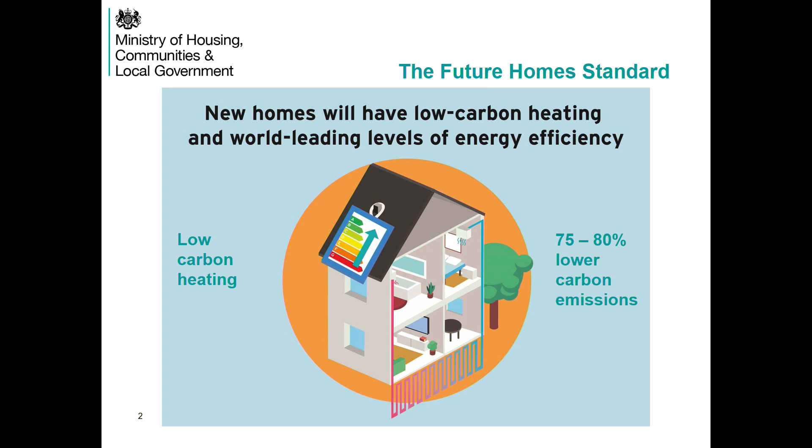So what is the Future Homes Standard? By 2025, we want homes to be extremely energy efficient and to have low carbon heating. So let's talk a bit about low carbon heating.

We think there are probably three leading technologies for low carbon heating. Heat pumps are going to be absolutely essential in decarbonising the building stock. But also we think heat networks are going to be really important as well—great in high density areas like cities, and great because they can decarbonise through time.

Another technology we think is important, but maybe not quite as important as the others, is direct electric heating. We think that's got a role to play where the fabric is really well insulated and you need not very much space heating. We're keen that the Future Homes Standard remains technology neutral, keeping it open for innovation, such as perhaps hydrogen in the future. We want to make sure any low carbon technology is accompanied by really high levels of energy efficiency, and the Future Homes Standard is intended to deliver 75 to 80% lower carbon emissions than our new homes right now.

So let's talk about a little bit of context while we're talking about electric heating. As well as standards for new homes, there's a lot of work going on nationally, changes occurring in the electricity grid. Historically, the North Sea has been an oil and gas resource, but now there's actually quite a large amount of wind turbines there as well. Growing the capacity of renewables on the grid and moving away from coal in our power stations means the reduction of the carbon intensity of our grid has really increased recently.

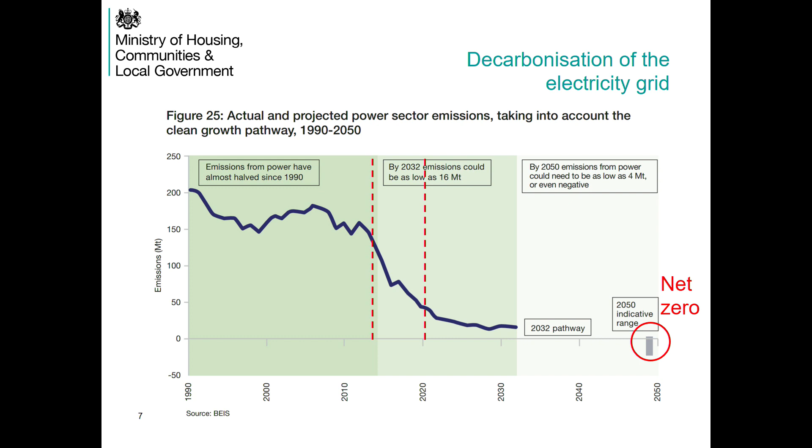So let's talk about how we're going to get to the Future Homes Standard in 2025. The Future Home Standard consultation was all about what we're doing in 2020 to get us there. We're proposing an interim step in 2020 to increase the energy efficiency of homes right now, make sure they're low carbon right now, and prepare us for 2025.

We presented two consultation options, option 1 and option 2. Option 1 is a 20% reduction in carbon emissions compared to our current standard, and the idea is it delivers the fabric standard we need ready for 2025. Option 2, our preferred option, is an even more ambitious uplift of 30%, but it means it should start encouraging people to install heat pumps right now, and getting those supply chains and skills ready for 2025 is absolutely fundamental.

I'm going to show you some examples in a minute, but before I do that, I'm going to tell you a bit about the metrics we're using.

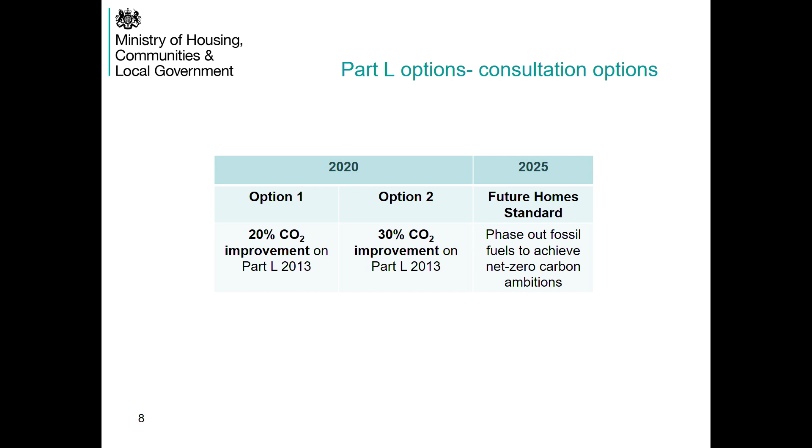We're proposing to keep our carbon target as we do now. We're also thinking of introducing a primary energy metric, to drive overall building energy efficiency. We're going to keep our backstops - our minimum standards for fabric and for building services efficiencies - but we're going to uplift both of those a little bit, and you can see the proposals in the consultation.

We're also considering introducing a brand new metric alongside primary energy - affordability. In the national calculation method SAP, we already estimate running costs, and we're thinking of using that estimate to make sure bills are really low in new homes. The idea is to make sure that if you're using electric heating in a brand new home, such as direct electric heating or heat pumps, it's really good for the consumer. In the consultation, we asked for views on where this level should be set.

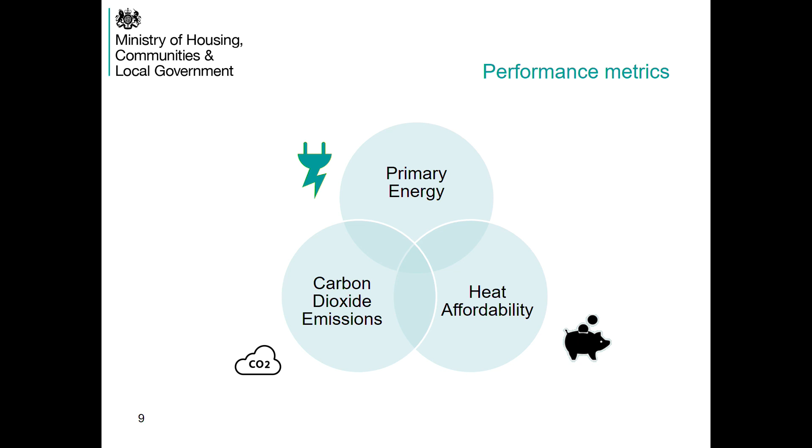Let's go through a couple of examples. These results can all be made by using the new consultation version of SAP, which was out for the consultation, and we've left it live so people can keep testing their building designs.

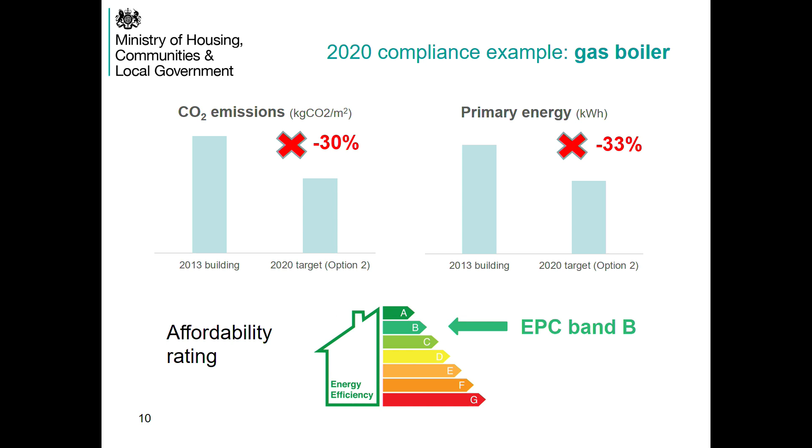This building is a 2013 home, but with a gas boiler, and we tested it against the 3 different metrics. It fails on CO2 emissions, it fails on primary energy, and it's got an EPC band of around B. To meet the 30% uplift we're proposing for 2020, in the consultation we proposed you could add some solar PV panels and wastewater heat recovery. That still won't get you all the way to this 30% uplift, so you'd also need fabric measures - probably slightly better windows and roof - to get you all the way there. It's an EPC band B, so it's likely to be okay for affordability.

Let's look at this with a heat pump instead. This is a 2013 home - get rid of your gas boiler, put in a heat pump. It passes CO2 emissions quite comfortably, but it fails on primary energy. You'd make a 19% improvement on your primary energy and get to only an EPC band of C. So meeting 2013 fabric standards and just putting in a heat pump is not going to get you there - you need to do quite a lot more to meet this primary energy standard. And depending on where we set the affordability metric, it might not pass on that either.

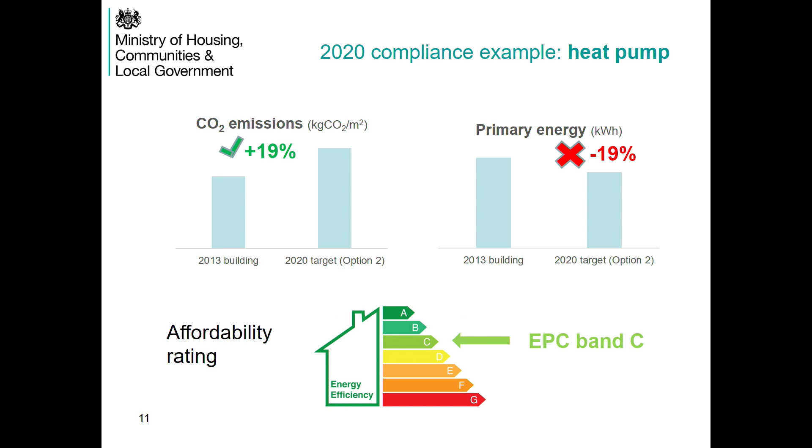I'm going to say a couple of words on transitional arrangements. So when we make changes to building regulations, we recognise that industry needs a bit of time to adapt to these changes, particularly if they're fairly major changes in the way we construct buildings. So we historically allow a period of transition before housebuilders have to adopt the brand new standard.

It's for a really good reason, but in the past this has led to some housing developments being built to quite old standards. There are examples right now of housing being completed to 2006 standards, and that's not right. That's not the point of transitional arrangements.

So to prepare us to get to the 2025 standard and to transition there quickly, we're proposing a more stringent set of transitional arrangements.

Those transitional arrangements we laid out in the consultation, and the proposal is that they will apply only to individual buildings, so individual homes on site, and also that they'll only apply when building is started within a reasonable period. We consulted on what we think a reasonable period is, and we've had some really helpful feedback from the house building industry on what they think reasonable means.

This is the first time this has been proposed for any building regulation. We just want to make sure that new dwellings are meeting this new up-to-date standard ready for 2025.

This is a national standard for England, and it's a huge step change in the energy efficiency of new homes. It's a consistent national standard across the country, and it's underpinned by significant technical work and extensive consultation. It can't be negotiated away by developers, and neither does it rely on carbon offsetting schemes.

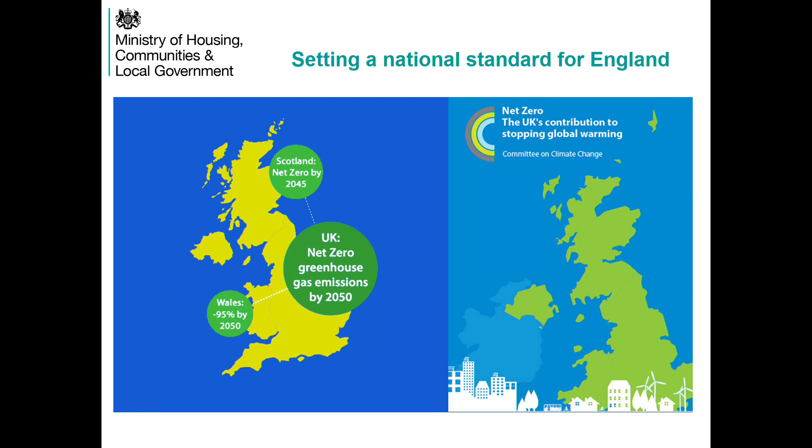Very briefly, I'm just going to tell you about a couple of other things in the Future Homes Standard consultation, just a bit of a plug. So it wasn't just about energy efficiency, it was also about ventilation.

We proposed some improved standards based on latest evidence. We proposed to improve the air tightness testing regime, to open it up to innovation and make it a bit more independent. We also proposed some ways of improving build quality, reducing the performance gap, making sure that homes perform really well in practice and not just on paper.

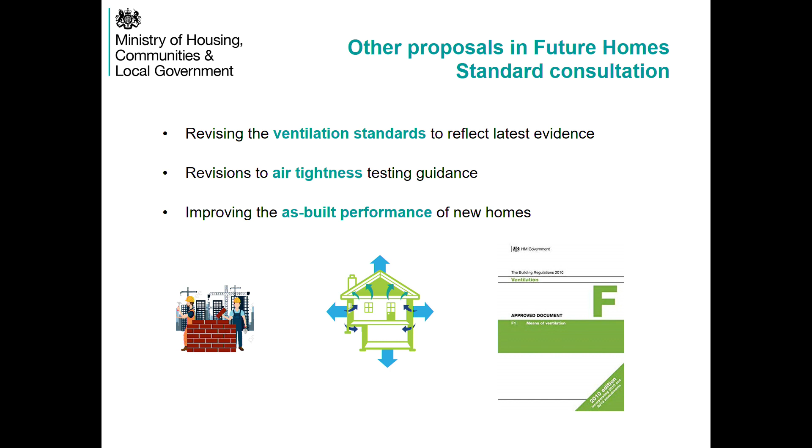We also committed in that consultation to another one, so look out over the next few months, there's something else coming. The next consultation will include overheating, which I know is a topic close to many people's hearts.

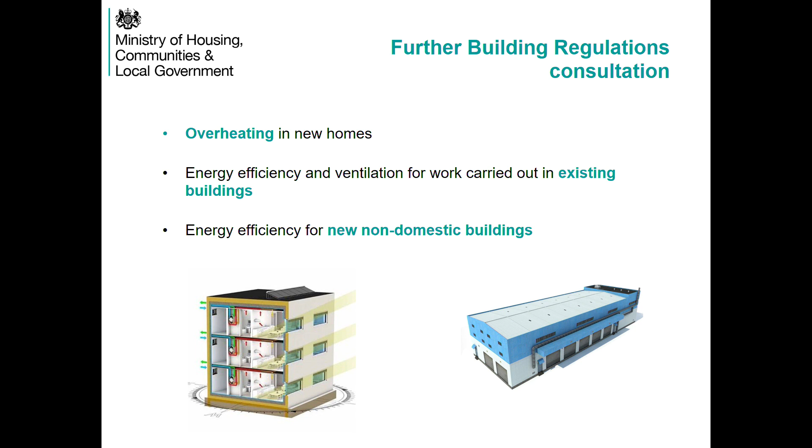I'm going to tell you a couple of very brief things about overheating because it's so heavily linked to housing. So we put out some research alongside the Future Homes Standard. I recommend that you have a look, it gives you a bit of an idea about where we might go in the future.

It showed that overheating isn't just a London issue, it isn't just a southeast problem, and there's overheating occurring all over the country.

Particularly at a time when we're increasing energy efficiency standards, summers are getting hotter and more extreme. We've got an ageing population who are spending more time indoors. Overheating becomes really quite important, and we'll be addressing this in our next consultation.

Just very, very briefly as well, because it launched this week and I should really say something about it. On the Buildings Mission, the government are looking beyond 2025, considering what technologies will be available in the future, and also considering the issues of an ageing population alongside climate change and energy efficiency.

That's why this week government has launched the Home of 2030 design competition. It's been created to drive innovation in the provision of affordable, efficient and healthy green homes, and there's a £40,000 prize awarded to all shortlisted entrants.

I believe that the people that win, there'll be 3 winners, they'll get to work with Homes England and look at maybe developing some of these homes, so it should be really good. The idea is to showcase best practice and start normalising these sort of interesting future-looking designs that are good for the environment and also suit an ageing population.

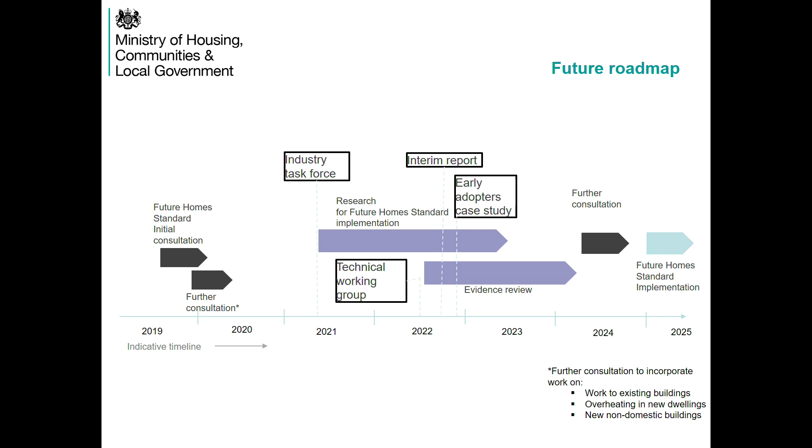Thank you very much, Victoria. I really appreciate your coming along, and I know the Part L consultation has stimulated many, many conversations and now lots and lots of responses, so I'm sure we'll get some questions on that later.

Right now I'd like to move on to our next speaker, who's Tom Dollard, an architect and head of sustainable design at Pollard Thomas and Edwards. Tom's going to talk about some examples from the BEIS Building for 2050 programme, which he's one of the lead assessors on. Thanks, Tom.

Thanks, Lynn. Hi everyone, I'm Tom Dollard. I'm working with my company, Pollard Thomas Edwards, and AECOM on this project for BEIS. It's called Building for 2050, looking at low carbon, low cost housing - how do we upscale low carbon housing for the future? I've got a very short film that we produced to introduce the project. We're working on a longer film that will be issued next year.

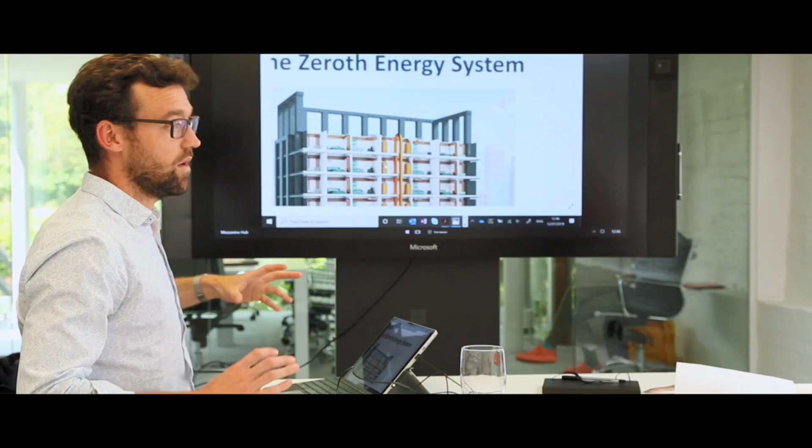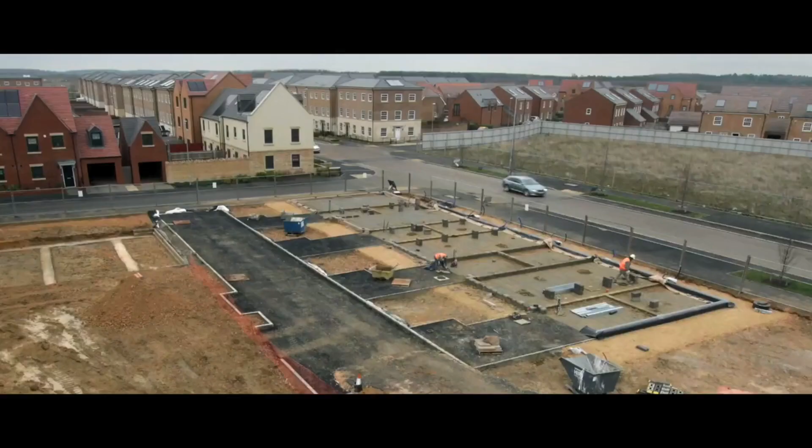Heating and powering buildings accounts for 40% of our total energy usage in the UK. By making our buildings more energy efficient and embracing smart technologies, we can cut household energy bills, reduce demand for energy, and boost economic growth while meeting targets for carbon reduction. As part of the move towards these goals, the government has funded Building for 2050 through the BEIS Energy Research Programme, a major 3-year research project set up to evaluate what can be done now to accelerate the shift towards wide-scale construction and adoption of low-cost, low-carbon homes.

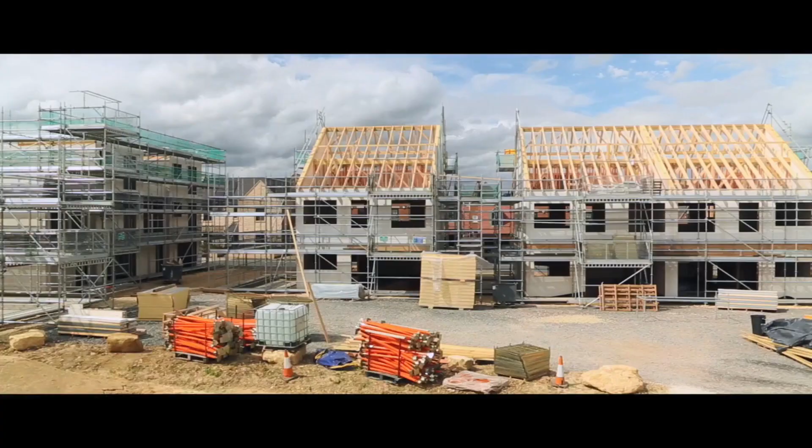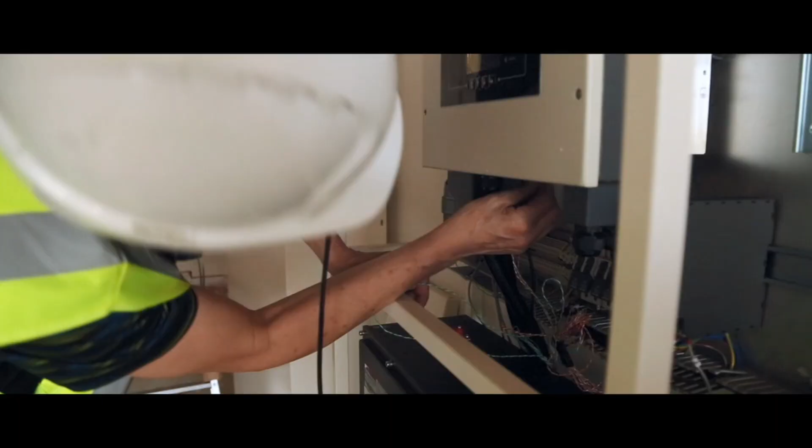To do this, low-carbon housing developments across England and Wales are being evaluated from start through to occupation. We've got an interesting project here which is doing both social research, asking people for their views, and physical research, testing the homes, seeing how well they're built, and measuring how much energy they use when people live in them, people like you and me. The team is carrying out detailed interviews and observations of the construction projects, including a wide range of stakeholders, interviewing 100 experts from industry and beyond to find out how best to meet this challenge.

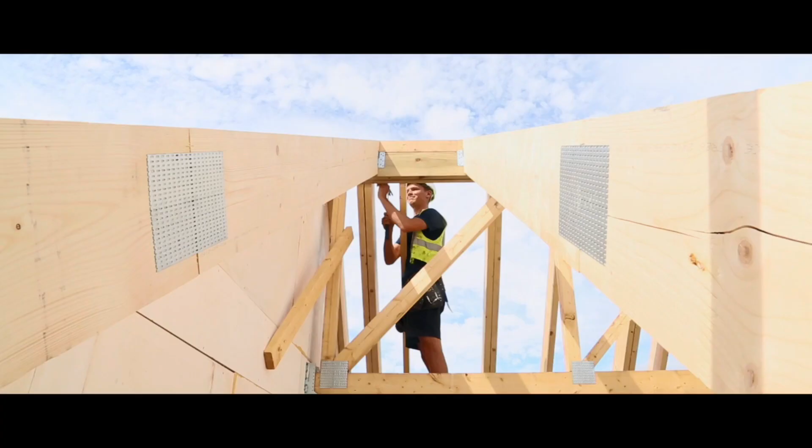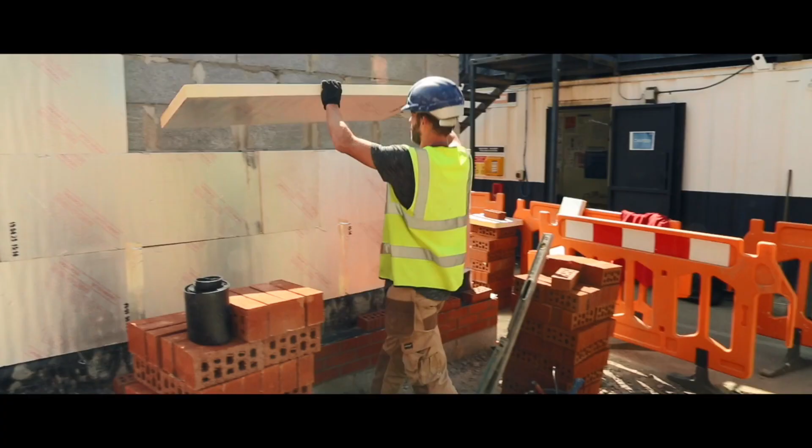Really excited about our findings, the potential outcomes. I think they have great potential to change policy and, more importantly, demonstrate to industry that these sorts of homes are very buildable, cost effective, and being done now. So why can't we build every new home as a low carbon home? The project will conclude in 2021 by delivering key research findings and recommendations to find ways to increase demand, improve supply, and deliver improved energy and carbon performance across the UK.

As I said, we'll have an update with a lot more detail in a year's time. So if you want to know a lot more detail about the methodology and our findings, that will be available in the next film. So, this is I think this is what the film said - project objectives, there are 7 project objectives. Context - we've done a year's worth of literature review and seen who else is doing low carbon housing in the industry. Drivers and barriers - what are the drivers, barriers, attitudes and challenges to building low carbon homes?

Understanding the occupant experience - this is primarily a social research project. We really want to understand the attitudes and expectations of residents, and the role of technology: are we fitting the right technologies suitable for residents in these projects?

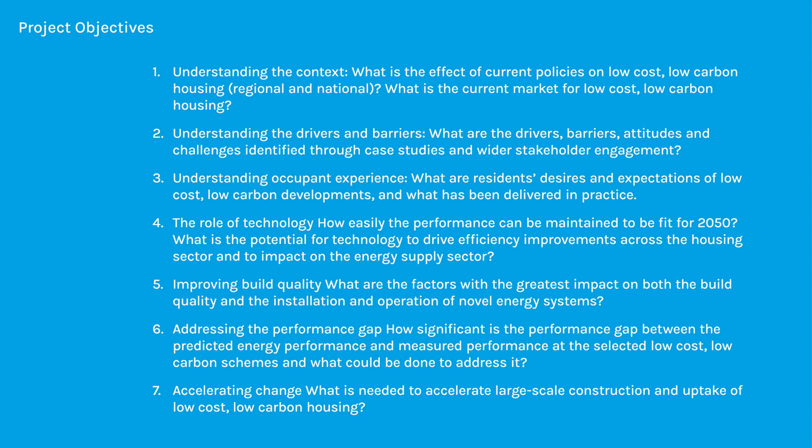Then improving the build quality - you've got to make sure these are installed correctly and deliver the desired outcomes. Then the performance gap, which is a key part of the energy strategy for the UK, actually delivering what you set out to design. And finally, how do we accelerate large-scale construction and uptake of these homes, increasing supply to the mainstream?

My role is leading on the site review process. This is just a small amount of what we're doing on site. We undertake about 7 site reviews during construction, reviewing every stage of the build as it goes along. At the end we do post-construction fabric and service testing - thermography, in situ U-value testing, tracer gas test, ventilation commissioning and testing. And then we have a year's worth of occupancy monitoring across energy and environmental outcomes.

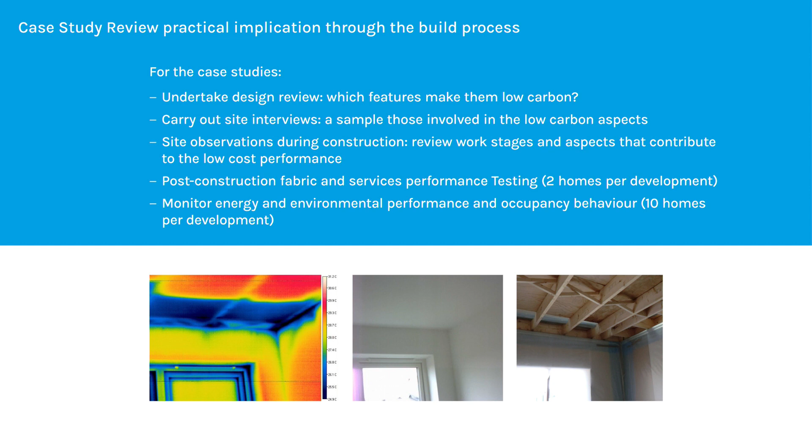The other 50% is all the social side. We do intensive focus groups with residents before they move in, 3 months into their living period, and a year after they've moved in.

This is an insight into our checklist for sites - the first fix stage. This is myself and my team going through the elements in SAP, checking the ventilation ducting is the same as design. We know from previous research that ventilation and gaps in insulation is a common performance gap, so we're looking for those as we move through the site.

Other simple things we're doing on site: checking the insulation is the same specification, checking the dimensions of walls, party walls for example, and checking for thermal bypass, where air moves through the insulation and causes worse performance. Essentially carrying out rigorous quality assurance, marking down where there might be a difference between design and as-built.

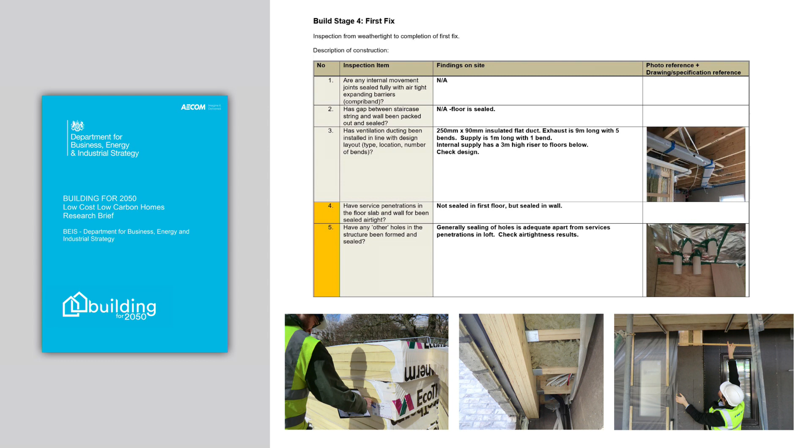At the end we carry out an as-built model based on that project, so we can tell the development team how far off they are in terms of energy and environmental performance. After it's complete, we've got a process of gathering social views across the industry and residents, interviewing more than 100 stakeholders from inside and outside industry, to button down this research question and get good recommendations for government and industry. Our final report will be out 2021-2022, with ongoing dissemination throughout.

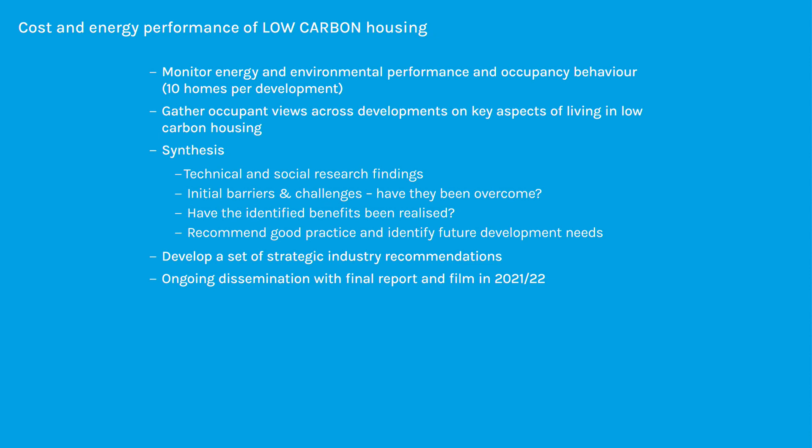I'm going to spend a minute now - mostly it's case study methodology. We've got 4 detailed case studies and a series of smaller case studies we've brought in, but these are the detailed ones where we do the complete process.

This is Active Homes in Neath, part of Pobl, the largest housing association in Wales, who partnered with the Active Building Centre to deliver Active Homes. Essentially it's fabric first, solution first, then you have TSCs - transpired solar collectors - providing a preheat to the heat pump, and solar PV, building integrated on the roof, powering batteries.

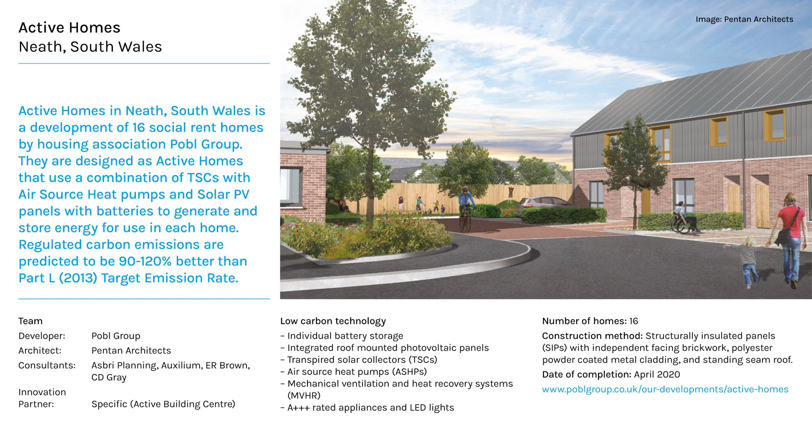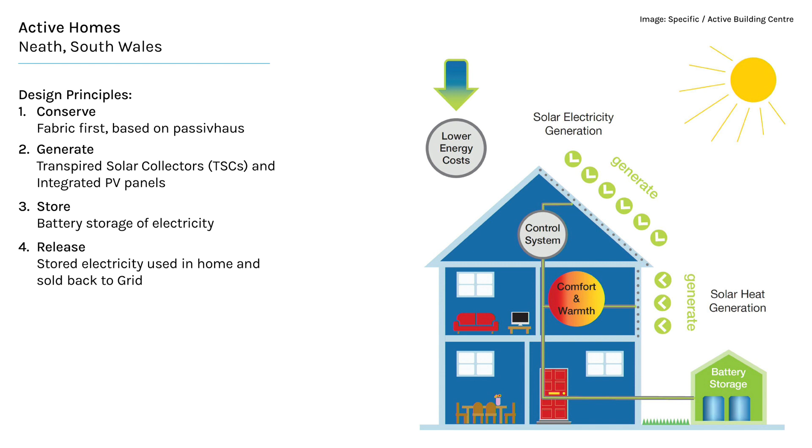Early stage tests show they're meeting the old zero carbon standard of 100% regulated energy, producing around 60% of their own energy through PV and battery storage. It's also an off-site timber frame, and they're working on how to produce that in the next iterations to include windows and other elements like floors and other off-site technology. That's the strategy, and the Active Building Centre design principles are: conserve, generate, store and release. That's a photo of site progress from last year - they're now due to hand over next month.

Second case study is in Corby - Project Etopia, Etopia Homes. It's 47 fully modular homes using a steel frame system, and the steel frame system meets the Passive House requirements.

In terms of low carbon technology, they have an earth store energy bank in the ground, and a ground source heat pump that receives energy from that interseasonal storage. They have a photovoltaic thermal hybrid solar array - PVT panels on the roof producing hot water and electric - and they have MVHR as well, as they're going down the Passive House route for fabric.

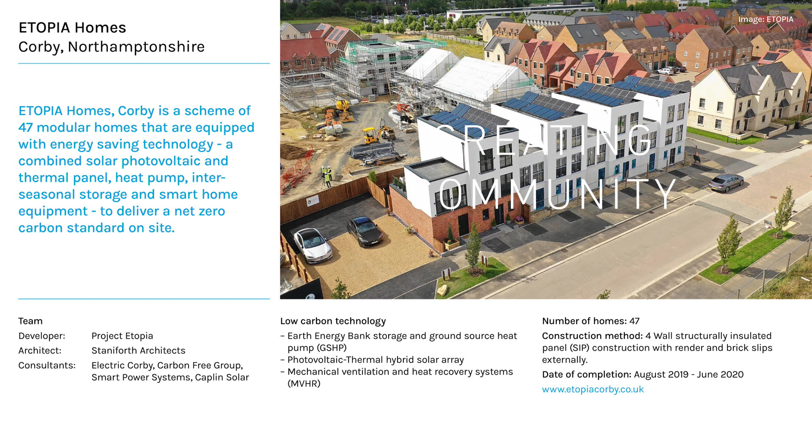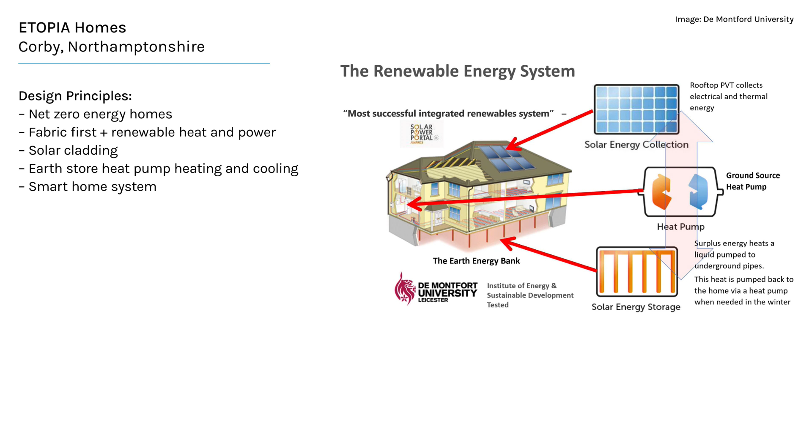That's the diagram of the technology involved. Probably the earth store heat pump is the most innovative part of this design, and they're clearly hitting the definition of net zero energy across all the primary energy.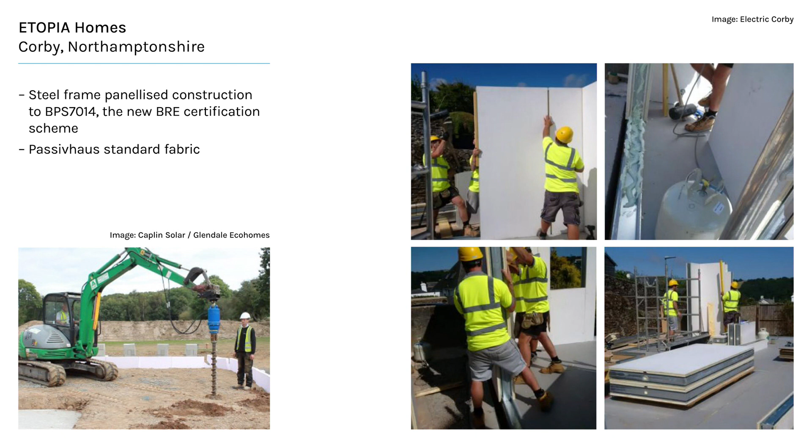The third case study is Marmalade Lane in Cambridge, and it's 42 custom-built homes. It's a co-housing project, very well covered in the press from the co-housing side, but it's also pushing the boundaries of a fabric-first approach with air source heat pumps and solar PV.

They didn't actually achieve the Passive House standard. They were slightly short on the air tightness, but the crucial thing is they set themselves a target for the fabric, which is 35 kilowatt hours, and aimed to achieve that and modelled it with PHPP. So it's a non-Passive House scheme, but it's learning from Passive House methodology.

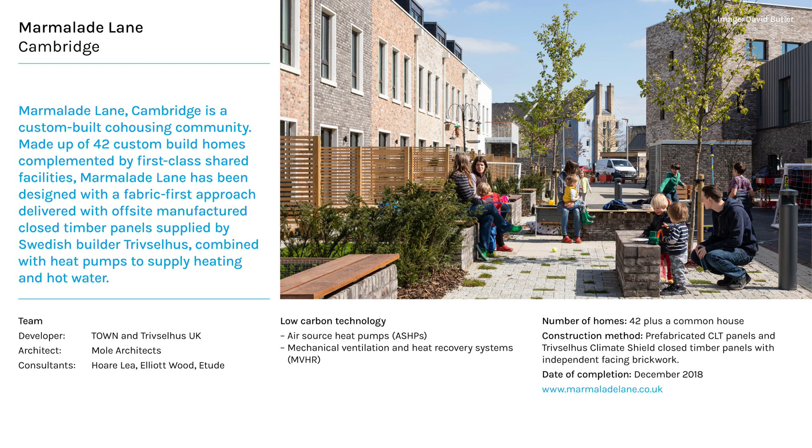It's also using prefabricated timber panels from Trivselhus and CLT panels in the apartment block. There's a 3D view, and a detail from the architect, Mole Architects, showing the level of detail, the attention to detail you have to get to if you're doing a high fabric, low carbon home.

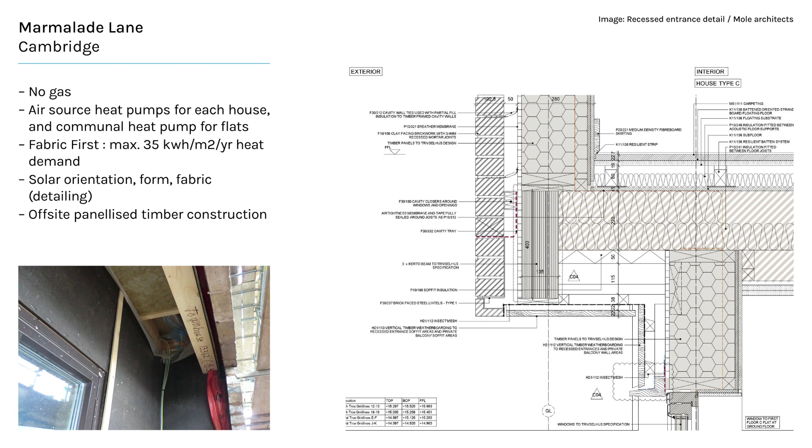And then finally, the last case study in London. We were really keen to get a London-based case study to show high density, because there's a lot of case studies looking at low-density housing, and it's almost straightforward to achieve net zero with low-density housing, but a lot harder with high-density apartments. So this is a 4-story apartment scheme, which could be scaled up to any height really.

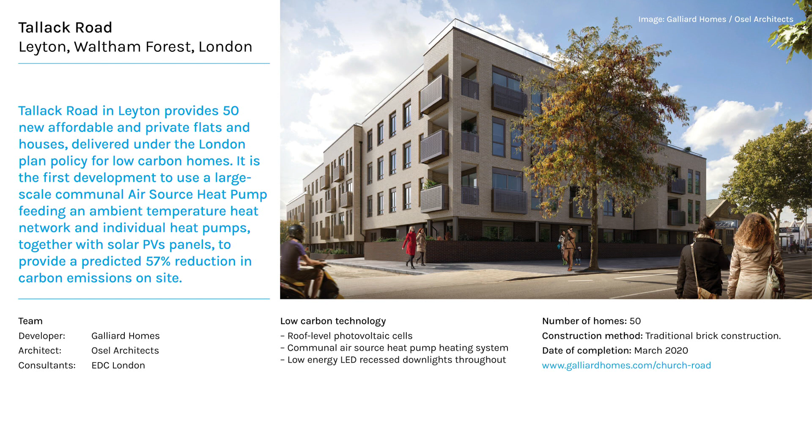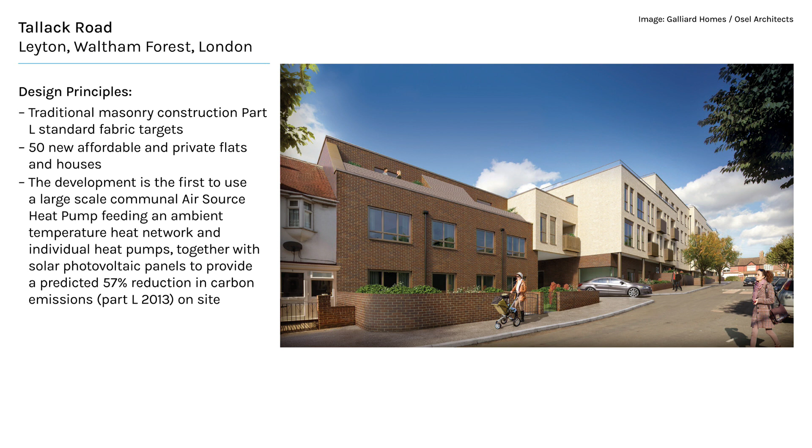The key technology is an air source heat pump that then ties into a water-to-water heat pump in each flat. It's fairly standard masonry construction, and there's certainly a question about when you're putting in heat pumps, does it allow you to relax the fabric standards? If you're looking at something like the Future Home Standard, can you get away with relaxing fabric, or should that be disincentivized? Because on this project, they put a heat pump in, and without any fabric improvements, they're getting 57% improvement on Part L. That's the heat pump system: a communal heat pump in the basement, and then individual water-to-water heat pumps in each flat.

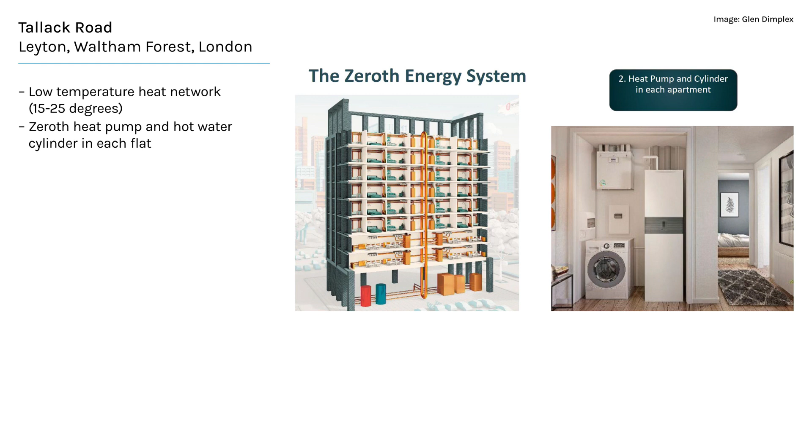To summarise, most of the developments bar one are finished now, so we're in the monitoring period. We've issued emerging findings to our clients, BEIS, and our stakeholder group in government, and now we're looking for wider industry stakeholders to come forward. We're looking at interviewing them, focus groups, and other case studies to see if we can do a slightly lighter version of POE, a slightly lighter version of what we've done on the other projects.

Findings and recommendations are due next year, and we're hoping to have some really positive and insightful lessons learned for the industry, to be able to show people that you can build low carbon homes now, and it is practical, it is cost efficient, and really there's no reason why we shouldn't be doing it next year. Thank you very much.

Thank you very much, Tom. We're all dying to get that wonderful set of information, so people will be knocking on your door. And also, you omitted to mention your wonderful book, Designed to Perform, which I'm sure has informed your assessment techniques on how to tackle the performance gap and the things to look out for.

So we're moving on to our next speaker, John Palmer, the Research and Policy Director of the Passivhaus Trust. John's going to talk about Passive House as a route for achieving zero carbon. Thanks, John.

Thank you very much, Lynn. Good afternoon, everybody. So, net zero — it's easy, isn't it? 65% of local authorities have declared a climate emergency, 75% of them have set a date for net zero. We've declared London's going to be net zero by 2030, plus 19 other cities.

So it's pretty straightforward. Let me tell you what I'm going to talk about. I'm going to start with some definitions, then define what I think net zero is going to be, how much renewable energy we'll need to make that net zero, and what our current standards are delivering.

Starting with some definitions, this is a chart from LETI, the London Energy Transformation Initiative, and it's really neat in displaying the difference between embodied energy and operational energy. Embodied energy is the energy which goes into construction, maintenance and disposal, and operational energy is the energy needed to run the building during its lifetime.

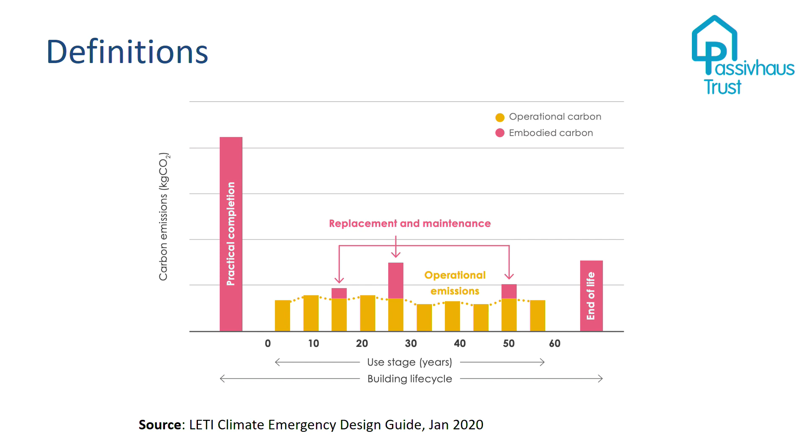Today I'm going to be talking about the operational energy, the yellow bits. Embodied energy is also required to get down to minimal and then offset to get to net zero, but today I'm going to be talking about net zero operational.

So, net zero operational. If you're able to, could you stand up please, everybody?

So, if you think that we have a chance of getting to net zero operational in the built environment for buildings by 2050, remain standing, otherwise sit down. Okay, a few people sitting down, mostly optimistic, excellent. If you think that we can get to net zero in the built environment operational for 2030, remain standing, otherwise sit down. A few stalwarts left. If you think we can get to net zero operational by 2025, remain standing, otherwise sit down.

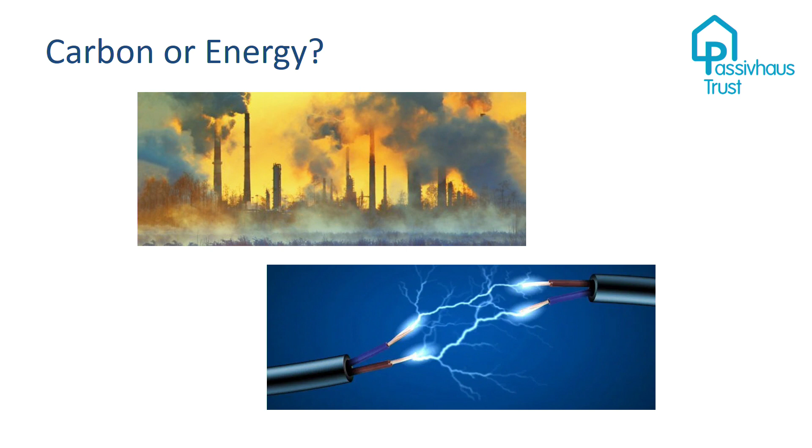No. What about energy? My 1 kilowatt light left on for an hour today uses 1 kilowatt hour of energy. In 10 years' time, if I leave that same light on for an hour, how much energy will it use? 1 kilowatt hour. So that's why, when it comes to buildings, we really need to be talking in terms of energy, not carbon. If we talk about energy, the carbon will look after itself.

So this is my little model of what net zero is. I'm going to talk about domestic buildings in the main, but this is similar to non-domestic. We've got heating, which is the biggest chunk at the bottom. Then we've got some hot water, and then we've got lighting. So if we want to be net zero, we've got two choices really. One is we go and live in a cave, we don't light fires, and we don't use any energy at all, and that is indeed net zero, but it doesn't sound too appetizing.

Or, whatever energy we do use, we offset with energy from where? From the sun, from wind, renewable energy. So we need to offset that energy. So if we've built our house and the amount of energy we've generated from renewable sources matches our heating, hot water and lighting, are we net zero? Hands up if you think we're net zero. A few. Well, no, we're not. And the reason we're not is because that's our regulatory version of how we use energy in buildings.

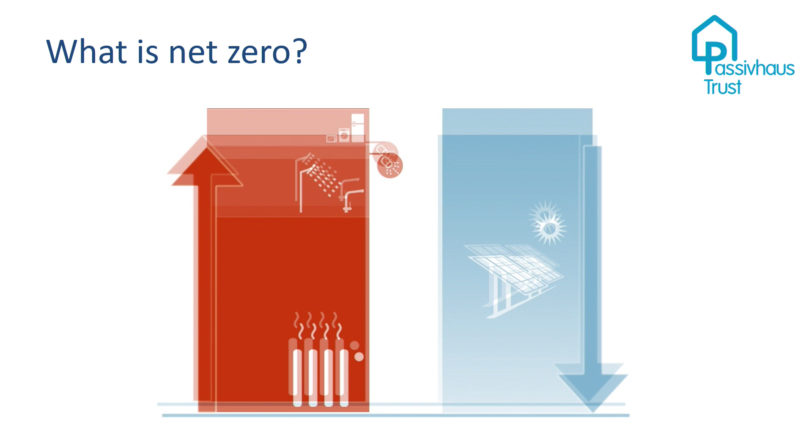We've forgotten something else which we use all the time in buildings, which is unregulated energy - that's plug loads. So we use appliances, fridges, TVs, etc. So now if we offset those, is that net zero? Any hands up for that? Oh, I've got one. So no, it's not. And the reason is because we've got to now move ourselves into a future nirvana. And in that future nirvana, be that 2030, 2040, 2050, are we burning any fossil fuels?

No, we're not. If we want to be net zero, we're not burning any fossil fuels. We cannot burn stuff, rule number one. So if we're not burning fossil fuels, where is our energy coming from?

Go on, shout out. Same, renewable sources. Okay, what is the main problem with renewable sources? Stops and starts, very good. So World Cup final, half time, does the wind conveniently blow and does the sun conveniently shine? No, it doesn't. So renewable energy comes when it feels like it. We can kind of predict it, but it's not reliable. So what does that mean?

That means we have to store it. What's the problem with storage? It's expensive, but what's the real main problem with storage? It's lossy. So if you put 1 kilowatt hour into storage, you might only get 0.9 kilowatt hour out, or 0.8, or 0.6, or 0.5, depending on your type of storage and how long you store it for.

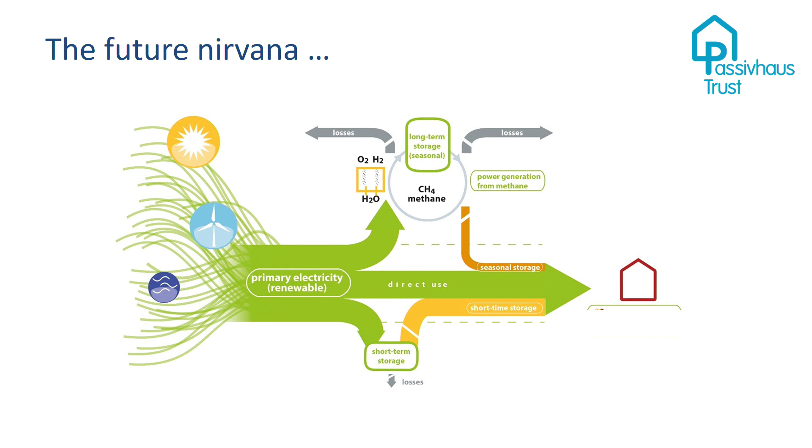So if you have lots of renewable energy in, for example, the summer sun, and you are only going to be able to use that in the winter when you need heating, that's interseasonal storage, which Tom touched on earlier, which is traditionally very lossy. So that means we've got to store things. That means for my building, if I need 1 kilowatt hour to run it, and I use storage, I actually might need 1.2 kilowatt hours or 1.6 kilowatt hours of renewable energy to actually make it net zero. So that means my actual net zero is not only my heating, my hot water, my lighting, my appliances, but also my storage losses in our future world.

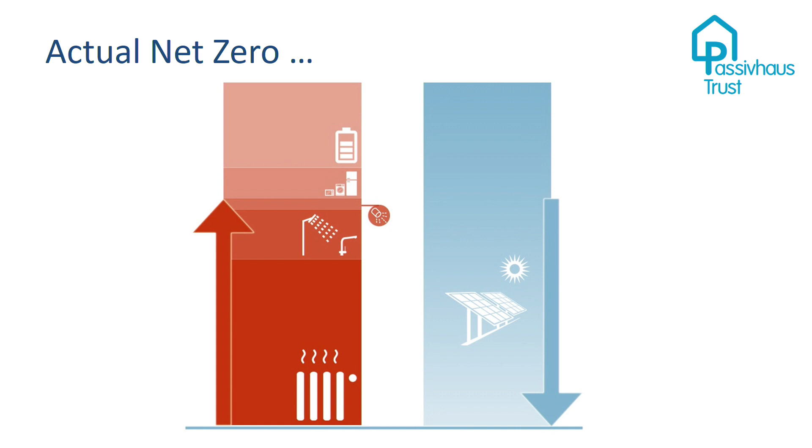So my column has got quite tall now, hasn't it? That means that the more I use, the more storage I need, the more storage losses there are, the grid needs to be able to cope with that, and I've got higher peak load, and I need more renewables. So is that achievable? Do I need a tall column, or a small column, or somewhere in between?

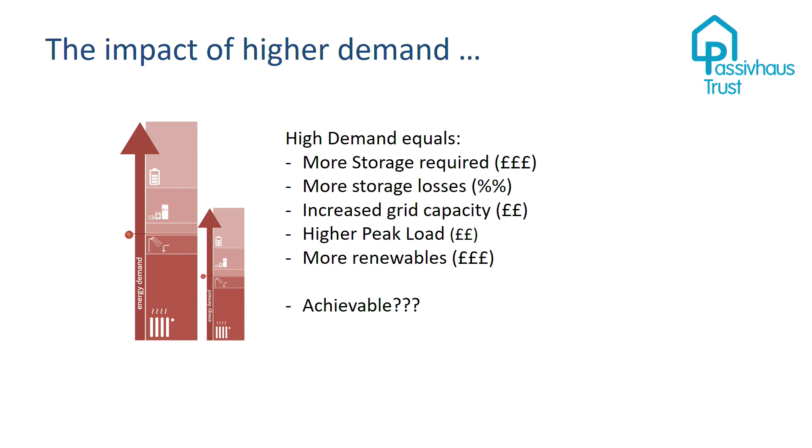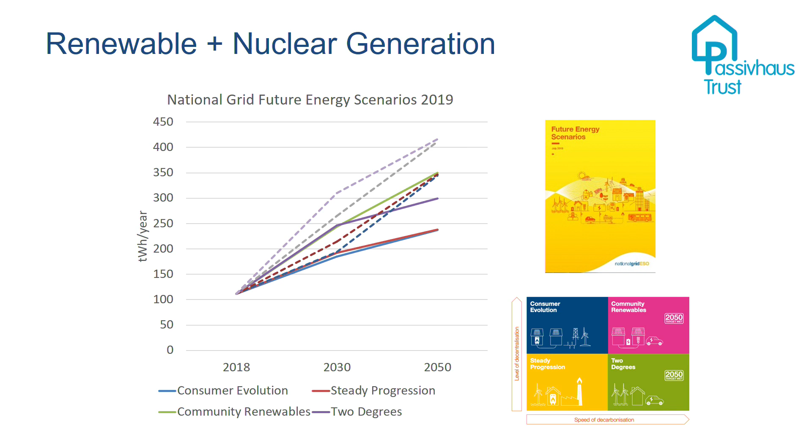Well, let's try and put some context on that. So how much renewable energy, I'm talking about my blue column now, how much will we have in the future? We can look at the National Grid future energy scenarios, and with nuclear power, we are going to get, in the best scenario, just over 400 terawatt hours per year. Is that good? It's quite good, it's not bad. How much of that can we give to buildings? Well, at the moment, if we divide up the pie of total energy, 27% goes to buildings. So let's say, for argument's sake, 27% of our future renewable energy goes to buildings.

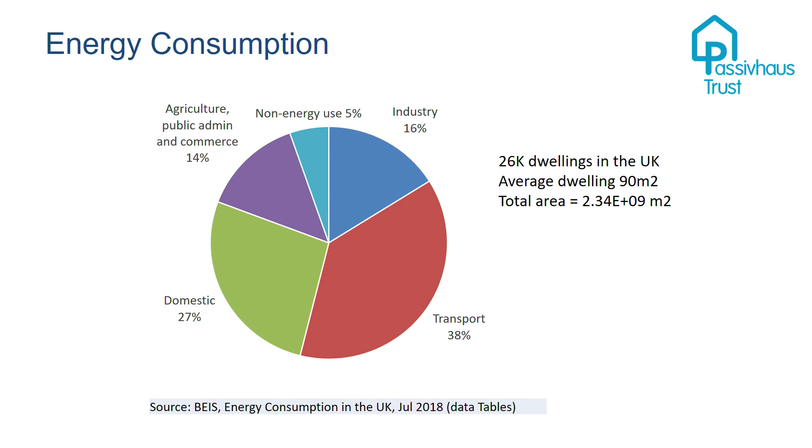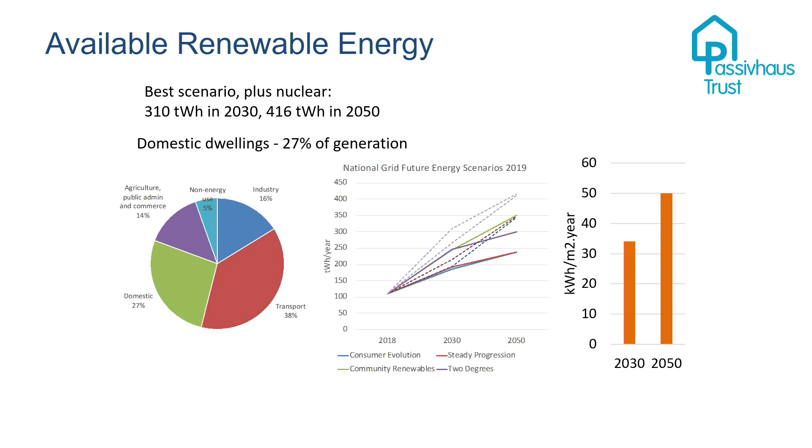What we can then do is work out from the amount of domestic floor area we're going to have in the country in 2030 and 2050, how much renewable energy we can afford to give per metre squared of domestic property per year in 2030 and 2050. So these numbers are around 35 and around 50 kilowatt hours per metre squared of renewable energy available. So that's the total size of my orange bar. I'm going to come back to whether that's good or not in a moment, but that just gives us an idea of balance, because everybody seems to think that we've got vast amounts of renewable energy and it is limitless, so we can build what we want. That's not the case. So at the moment, we're building to those kind of levels of efficiency.

So I've now taken my maroon chart, heating, hot water, electricity, etc., and I've turned it into real numbers per metre squared for dwellings in the UK. Roughly at the moment, with building regs and a gas boiler, we're designing to around 110. We're building to around 140 because we've got this performance gap issue as well. And then if you put in an air source heat pump and low carbon source, but include our storage losses, we're down to about 120. If we build to a passive house level of fabric efficiency, we're down to about 60 with our storage losses, or just over 40 without the storage losses. So that just gives you an idea of scale when it comes to fabric first and low carbon heat.

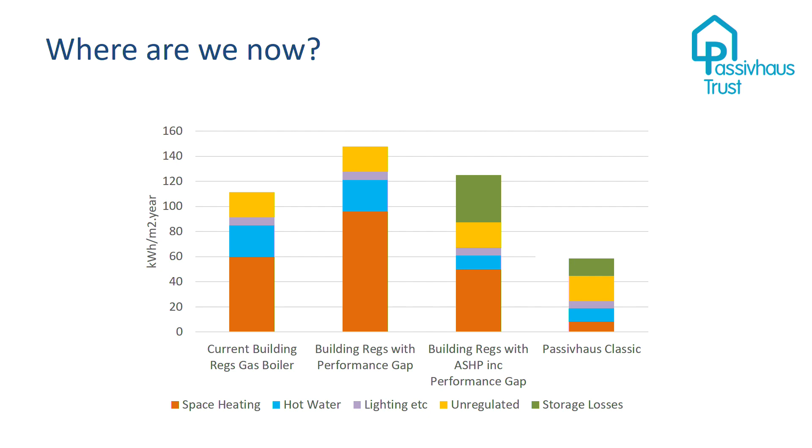Let's make that more real. I've now turned from kilowatt hours per metre squared to an actual building, a 68 metre square building, and this is the total demand over the course of a year. On the far left-hand side is an air source heat pump with storage losses, then we put in place a passive house.

To get my blue column sufficiently high to offset that and make it net zero, I need 14 solar panels. How big is a 68 square metre house or flat? Very small, it's my 2-bedroom flat, something like that. So how much space does 14 solar panels take? Quite a lot. Are you going to get 14 solar panels on every 68 metre squared house, flat, building in the UK? No, you're not.

So is it sensible, given this is passive house levels of efficiency and we can't really go much further, to think that we're going to make every house net zero individually? No. So how do we think about the problem? We need to go back to the whole of the UK and our whole renewables pot, and ask is our whole renewables pot big enough to make all our dwellings net zero? Because we can't do it on an individual basis. And buying a quarter of a wind turbine blade in the North Sea is a lot more cost effective than putting solar on every single house.

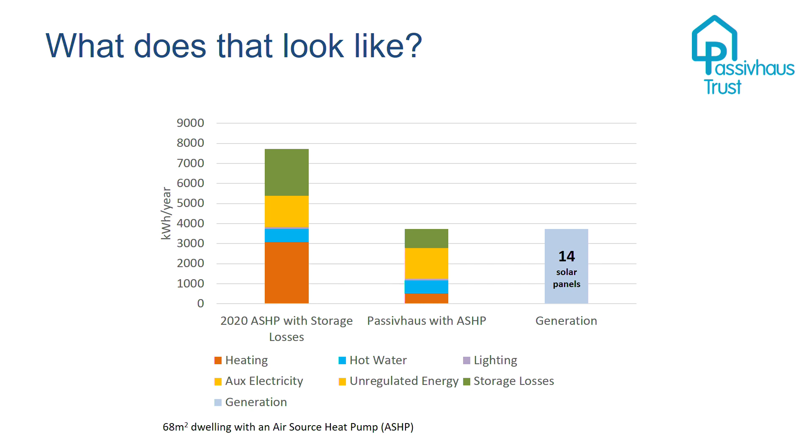So I've now turned these into different standards, and I've taken out storage losses because that's going to come from the grid. You can see the energy use intensity, the amount of energy that goes into the building when it's built to these different standards that is required to run it, in kilowatt hours per metre squared per year. On our current left-hand side, almost up to 140.

A 19% reduction, 20% reduction, which is option 1 from the Part L consultation, brings us down a bit. The London plan, which is supposedly zero carbon, brings us down a bit further. Passive house, low energy building, and then we've got a stab at what we hope the future home standard might be, and finally the passive house classic. So that's where we would be in terms of a continuum of performance levels for different standards.

So do you remember those figures I put up earlier? What were they? 2030 was 35, 2050 was 50. Okay, so there they are. Now what do those two lines tell you?

They tell you that if every single dwelling in the UK was passive house quality in terms of fabric in 2030, we will still not have enough renewable energy to make the built environment zero carbon. In 2050, if every single house in the UK, not just new ones but all dwellings including existing, were passive house levels or better, then we would just about have enough renewable energy. Are we going to make every single dwelling in the UK passive house by 2030 or 2050? No. It's one every 12 seconds if you want to get to 2030.

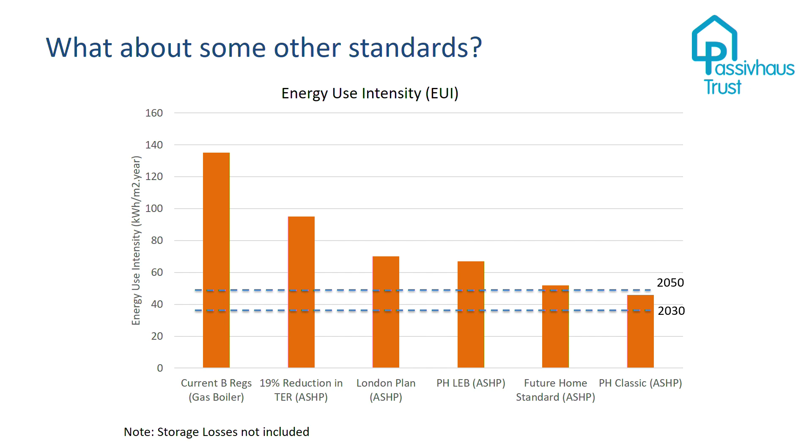So, it's a challenge.

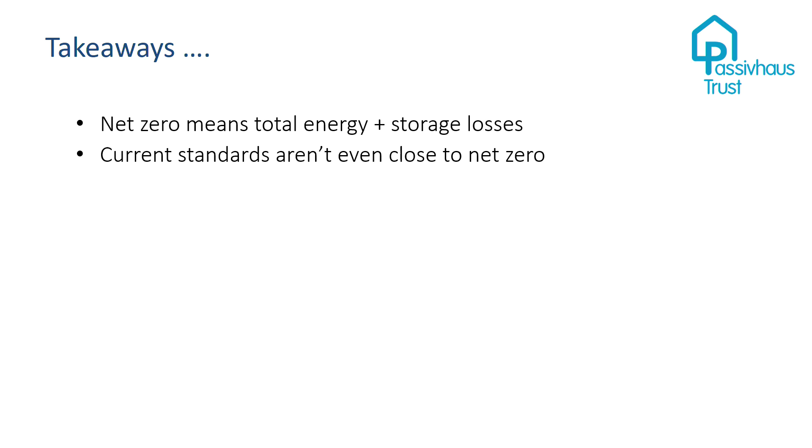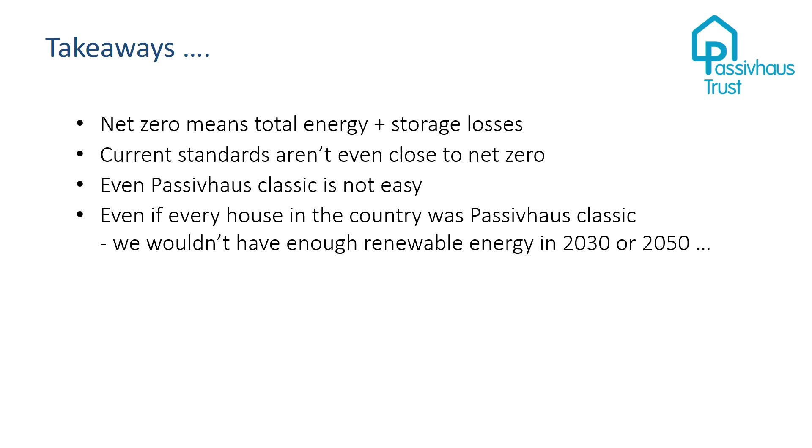Takeaways: net zero means the total energy that we use in a building plus the storage losses. We can't ignore them, they have to be taken into account. Current standards, despite what we might think or hope, are not even close to what we need to be in order to get to net zero, given the current projection for renewables. And even with Passive House Classic, which is the predominant fabric-first standard, it's not easy. There's 14 solar panels needed, and even if every house in the country had that, it still doesn't give us enough to get to net zero.

But all this is made worse if we're building fabric inefficient houses from now on in. Every house we build that is not of the maximum fabric efficiency, and when I say maximum, I mean passive house or better, is making the problem worse. And we're going to have to retrofit those houses at some point before 2050 if we're going to get to net zero. That's it, thank you very much.

Thank you so much, John. That was dynamite and a timely reminder of the big picture.

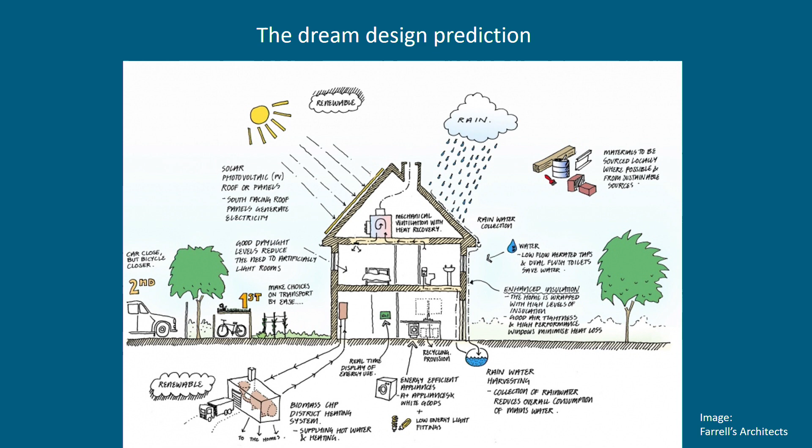And this is the dream. This is what everyone sitting in this room aspires to, which is the new 80% reduced energy efficient home with bells and whistles on it, everything we want.

But this is the reality of most homes in the UK, particularly new homes. The reality is we have situations like, and I hope I'm going to get the... doesn't work, it's broken. Not the TV anyway, something else.

These are some of the issues we're facing well beyond any demands for new standards. And of course, then we've got silly little things like pipes not being properly insulated.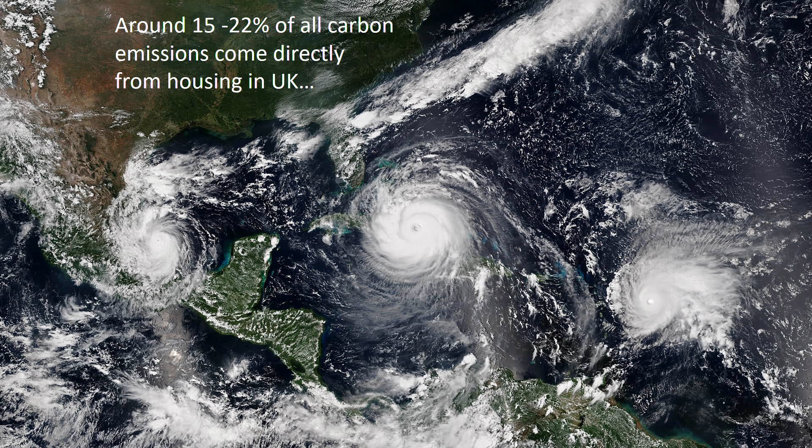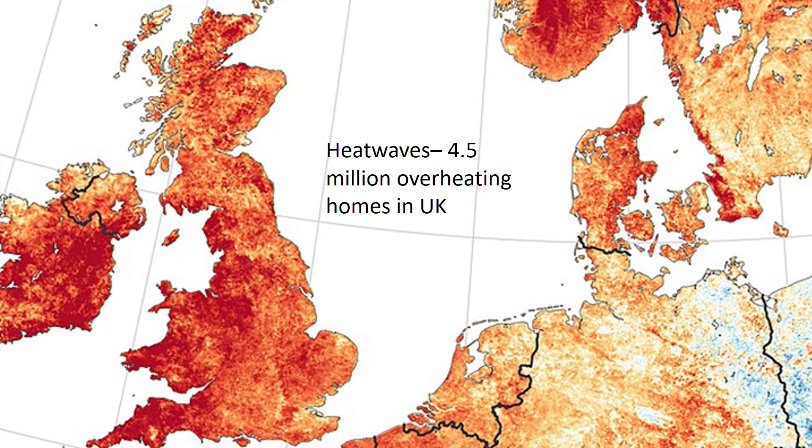And yes, we have 4.5 million homes overheating now in the UK. So it's far too late for the government to be talking about addressing overheating in the future. It's now. And yes, we've got 5.5 million people suffering from asthma in the UK. These are in homes that are not performing well because they've not been tested.

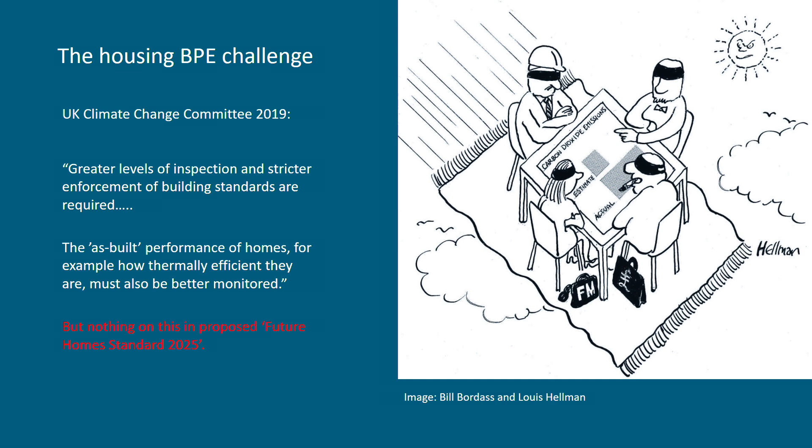So here's the challenge I put to all of you today. The Climate Change Committee has demanded greater levels of inspection. The Climate Change Committee has demanded that the government does as-built performance of our homes, that the new housing standard mandates the measurement of how much energy our homes are using, the measurement of the air quality inside our homes, the measurement of how our fabric's performing. That is not in the new proposed housing standards at the moment, and it should be.

And why? Because we know that homes routinely underperform, often using at least twice as much energy as they're supposed to use. And that's not just Wimpey and Barratt and Crest and whatever else. That is the architect-designed homes as well. The only homes that really cut it consistently are passive house homes.

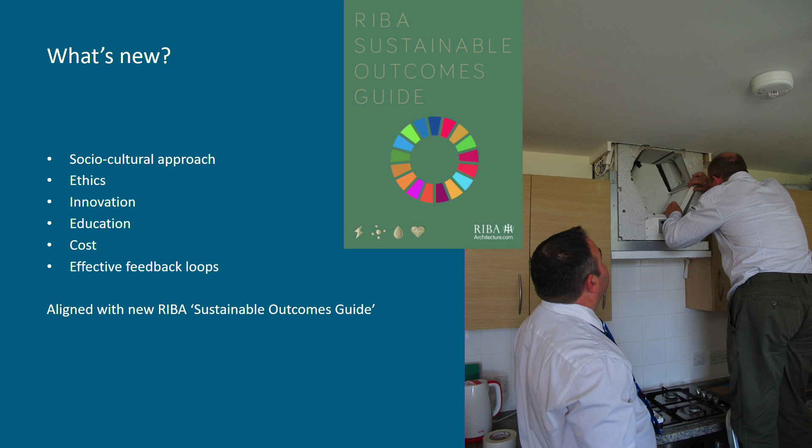And the great thing is the book is directly aligned with a fantastic initiative by the RIBA, a free download called Sustainable Outcomes Guide. Brilliant document, just launched a few months ago. I urge you all to read it if you've not read it already.

So the key questions are: are our homes doing what they're supposed to be doing physically? Are we happy with them? Are there any problems? And what can we do about that?

And the real parameters that we need to be looking at are, we need to look at the hard data that Tom Dollard was talking about. We need to measure some things. But crucially, as he said earlier, we need to understand what the home is like to be experienced. What are we actually going through in our homes? What are we experiencing?

And do you know what? Most architects don't know what the occupants of their designed homes are actually experiencing because they don't go back to find out. And why don't they do that? Because they don't have to. It's not mandated. Then we analyze all of that, and we can actually build better homes.

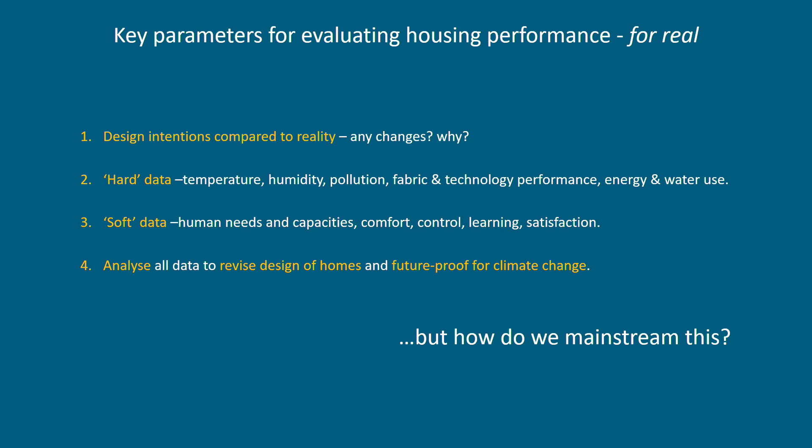Not only can we build better homes, we can actually make sure our homes are future-proofed for the climate emergency. But how do we get this happening on a mass scale?

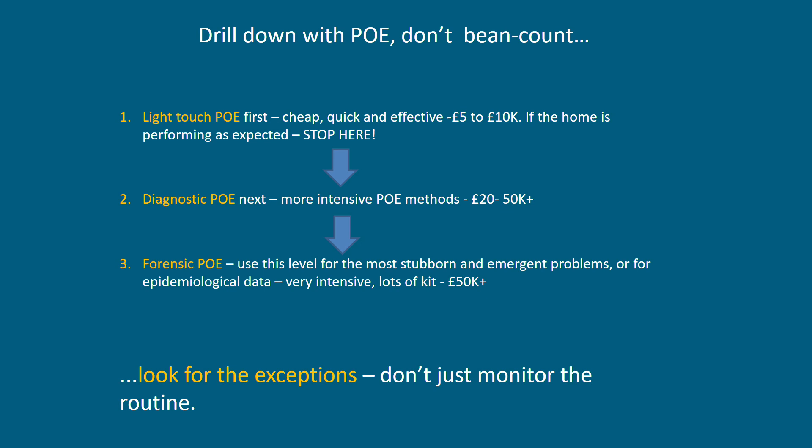POE is simple. You don't monitor the routine things, you look for what's misbehaving. That's what's important. So the 6 key things which Tom touched on earlier is, first of all, review the actual design documentation. Secondly, do a very quick audit of how much energy the home's using, how much water it's using. Then use one of these fantastic gadgets called a thermal imaging camera to see whether or not your insulation's working.

Finally, ask the inhabitants, because they know better than the architects about what's actually happening in the home. Then do a short tour. Get the architect together with the builder, that would be a first sometimes, and the inhabitant, that would be a real first. Get them all together, walk around the home, find out how it's working. Do a quick spot check. And look, no sensors yet.

No sensors yet. If you haven't got one of these in your architect's offices or your engineer's office, shame on you. These are X-ray specs. You can buy one for 200 quid and plug it onto your iPhone. I used it on my own house. I showed my builder a big blue patch in my ceiling and said, look, you've missed out the insulation in my ceiling. And he said, fair cop. And we got the job done.

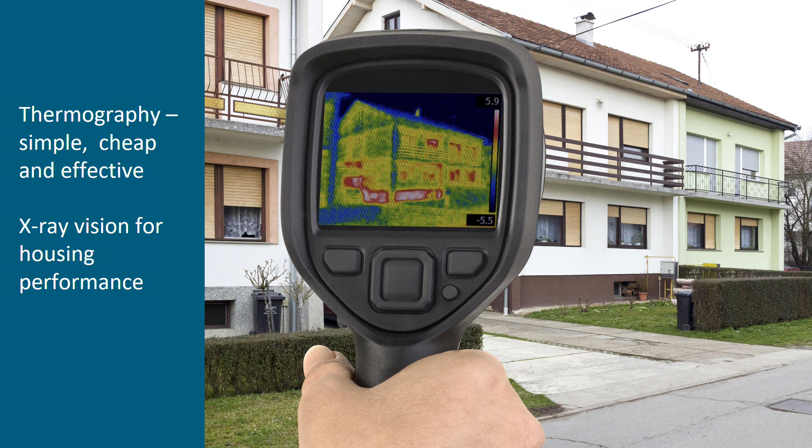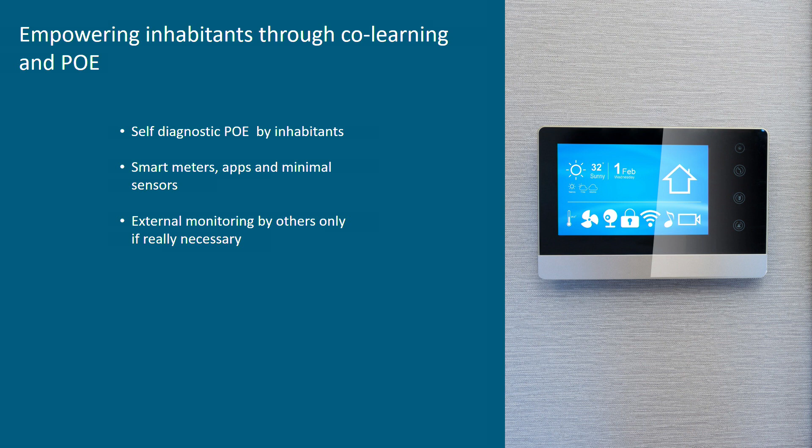Also, inhabitants are actually very good at monitoring their own homes if you give them the right kit and the right opportunities. So the external monitoring only needs to happen once we've educated inhabitants how to look after their own homes. Of course, we may need to delve deeper, and that's what Tom Dollard's great project is doing. You may need to do deeper monitoring, but don't start there.

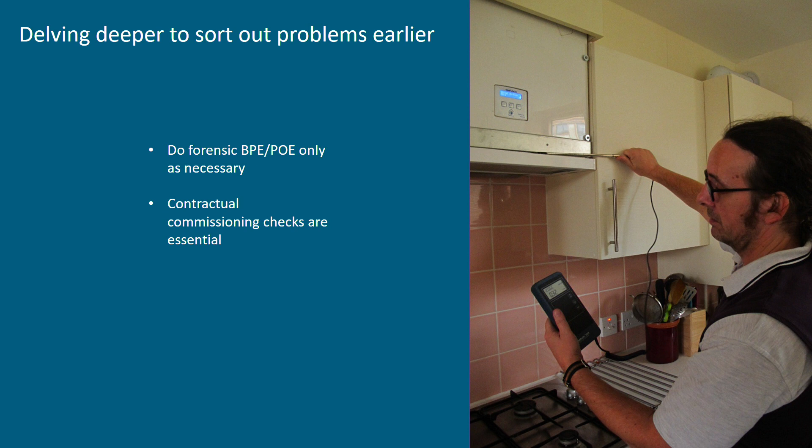And there is an obvious case for POE, and why on earth has it never happened? These are all the advantages of when you do it. You improve your product, housing developers and architects. You improve your process. For the insurers in the audience, for the people living in the homes, POE reduces the risks that are hidden in your homes because it exposes them early on. And that's actually a win-win. Better to know what's happening now than what's going to happen later.

You get reduced defects because you find them and you address them. Reduce maintenance because you improve your performance. As I said earlier, you can future-proof. You can find out that the home's overheating and what to do about it. But best of all, if you do POE and you improve your quality process, you get better satisfaction all round. And that, of course, means you get a better reputation, which means that as architects or developers, you get repeat business.

And isn't that what our government wants? Doesn't our government want better business? So why is our government not mandating POE? The RIBA have already endorsed it, they've endorsed the book. But where is the government? And where is the housing sector on this?

Well, there are some challenges. Doing post-occupancy evaluation does have ethical implications. You're dealing with people's personal data. So if you read the book, you'll understand how to do that safely. It's not taught. Why is it not taught? Because it's not mandatory. It doesn't need to be taught.

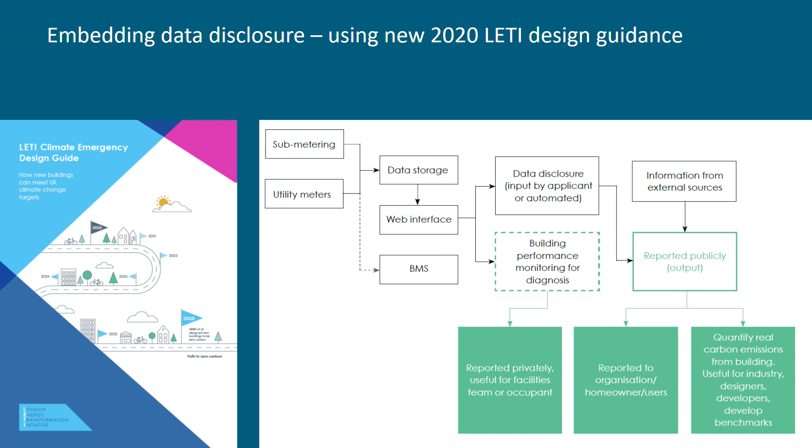Where we are getting leadership is with wonderful organisations like LETI in London, who've produced a free, fantastic downloadable guide. Read it if you haven't already. This is how to design housing for the future, and they give you the process as well for how to do POE, so thoroughly recommended.

So I've just got 10 urgent questions for the government today in relation to our future housing standards 2025. I actually thought 2025 meant that's when we were going to get the housing done by. Now I realise it's actually when we're going to get the standard out. Well, if we're going to get the standard out in 5 years' time, let's get the following sorted.

First of all, how will this standard verify housing performance? How will we know that our housing is doing what it says on the tin? Because at the moment, the standard doesn't guarantee that at all. It might do some measurements at point of completion, but it's not doing any post-occupancy evaluation.

How are we going to engage the inhabitants in our homes? How are we going to get them on board with this new standard? It's no use just getting the architects on board, or the engineers, or the developers. The bottom line here is we need to work with the people in their homes to make this work.

And how is the government going to make sure that POE is built into the construction process using the soft landings approach, which it took on originally and has now dropped? Why has that been dropped? I don't know. And how are we going to scale up POE so that instead of just 19% of architects offering it as a service, we have 100% of architects offering it as a service?

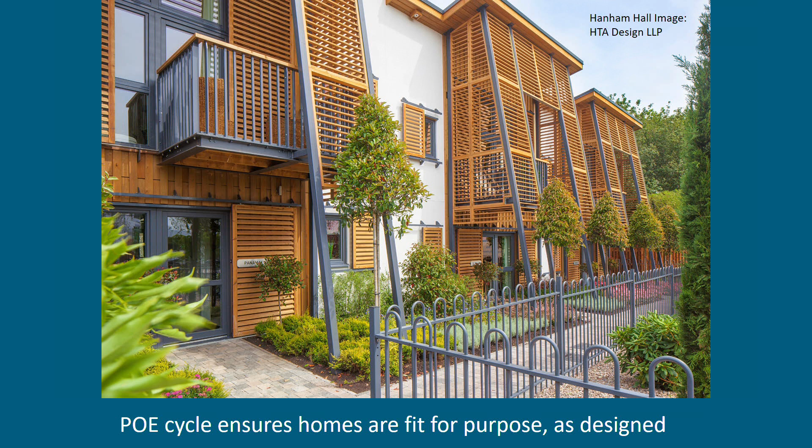And at that point, we can actually look forward to a standard that offers a real performance guarantee rather like Energiesprong. So, a quick whiz through, and POE is vital for homes that are fit for purpose. Thank you.